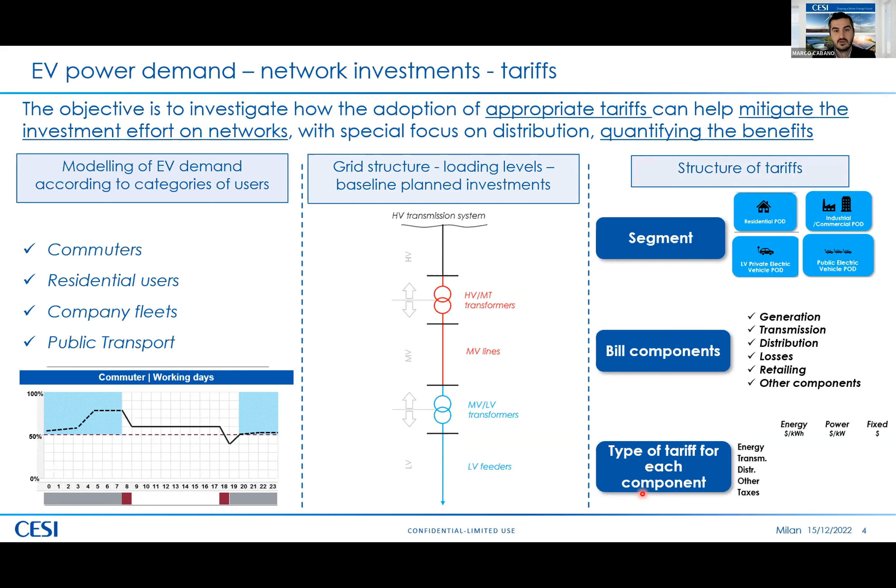We will present the results on a case study in the next slides, but I want to give you a very high-level description of the framework of the methodology we developed to do this assessment. We developed two different models, one for the forecast of electric vehicle demand and one for estimating the investment in the distribution grid.

The inputs of the model for the demand forecast have been the tariffs, flat or time of use, to measure the impact of the difference of the tariffs, the number of electric vehicles, of course, and also many model parameters that I will show in detail in the next slide, like the charging points, the charging behavior of the people, the use of the vehicle, and so on. The output of this first model is the EV electricity demand profile.

This is an input, of course, of the investment needed in the distribution grid, together with other inputs like the peak loads that we now have in the distribution grid we need to analyze, and also the load profile of the network components. We need to know also how the conventional load, so all the load except for electric vehicles, will grow in the next years. And we need to know the cost of replacing the components that need to be replaced because of the increase of load. The output is the additional investment due to the demand for electric vehicles.

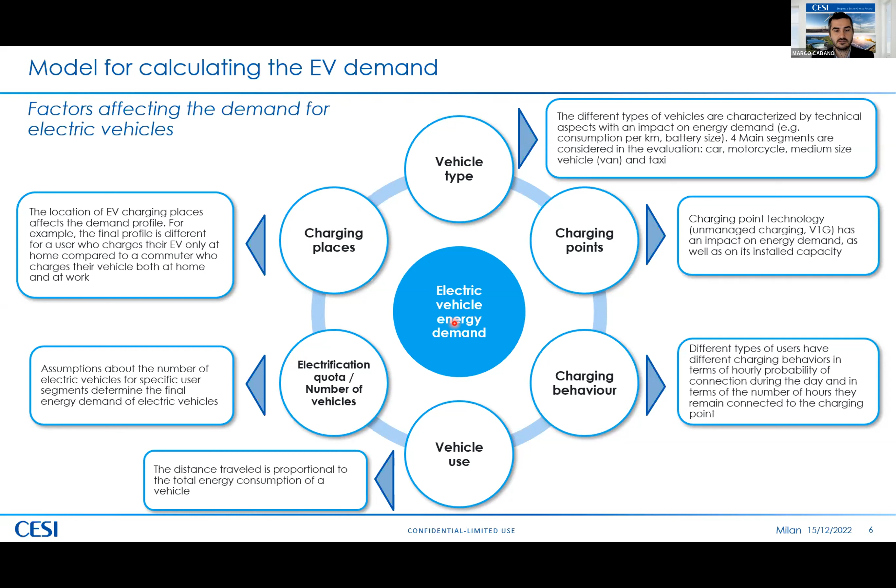So we need to model all this together, and this is very complex, but we developed a very detailed modeling of this.

What we did about time of use tariff to measure the impact of time of use tariff? Time of use tariffs are tariffs which are different during the day. So we did an iterated process in order to define, for the specific context that I'm going to describe in the next slides, which is the best tariff that minimizes the costs for development of the distribution grid.

And in this specific context it was a 2-period tariff with a low tariff period between 2 a.m. and 8 a.m. and a high tariff period in the remaining part of the day.

Which was this context? This disclaimer is very important, because I want to give you in the next slide some figures about the findings of our study, but the important thing is that the results are very, very related to the context. So I want to show you the results related to this context, because they are useful to understand the main behavior, the main figures, but of course, for different contexts, we need to develop specific studies with specific inputs, maybe with the same methodology, but with dedicated inputs.

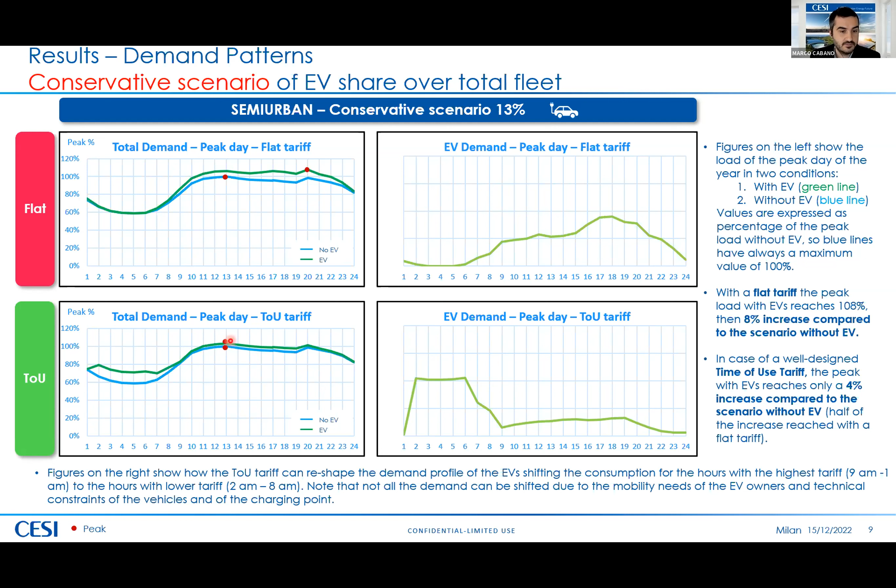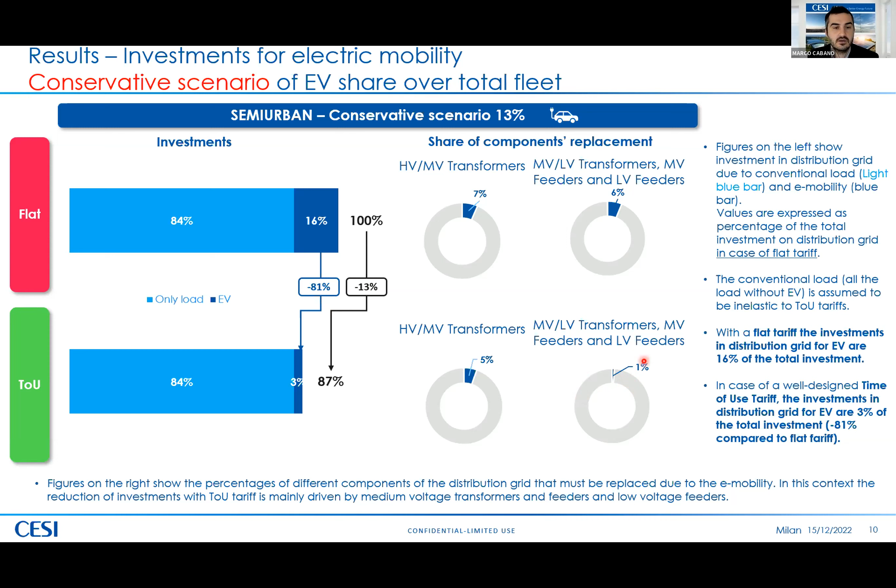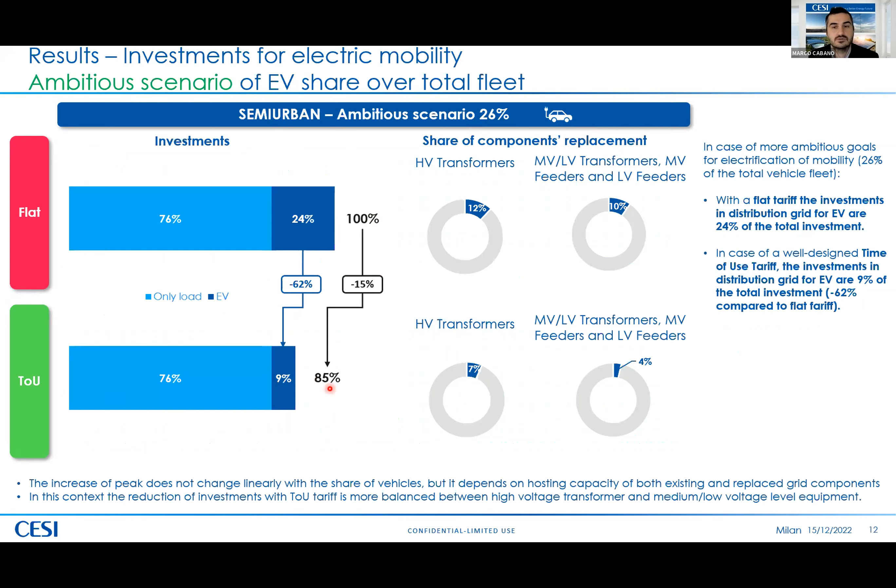And in terms of investments, we have these figures, so an increased reduction thanks to the time of use tariff. What we can see from this slide is that the behavior is not linear with the increase, because we have double the vehicles, but not all the numbers doubled, since the behavior is very non-linear. So we need to repeat another analysis with different assumptions of electric vehicles.

So just to go to the conclusion, we have highlighted the importance of decarbonization in the transport sector. This goal has many implications. Most of them are related to the development of charging points and refueling stations, and also to the development of renewables dedicated to producing the electricity that will feed electric vehicles. We need to improve the transmission and distribution infrastructure, but I hope that with my presentation I also emphasized the importance of appropriate tariff schemes to mitigate investments in the distribution grid.

Of course, we need modeling which is complex, and we also need a lot of data about the distribution grid to do very sound and reliable studies about these topics. So I give the floor back to the other participant in this discussion, and of course if you have questions you can write in the chat, or ask, or contact me later. Thank you very much.

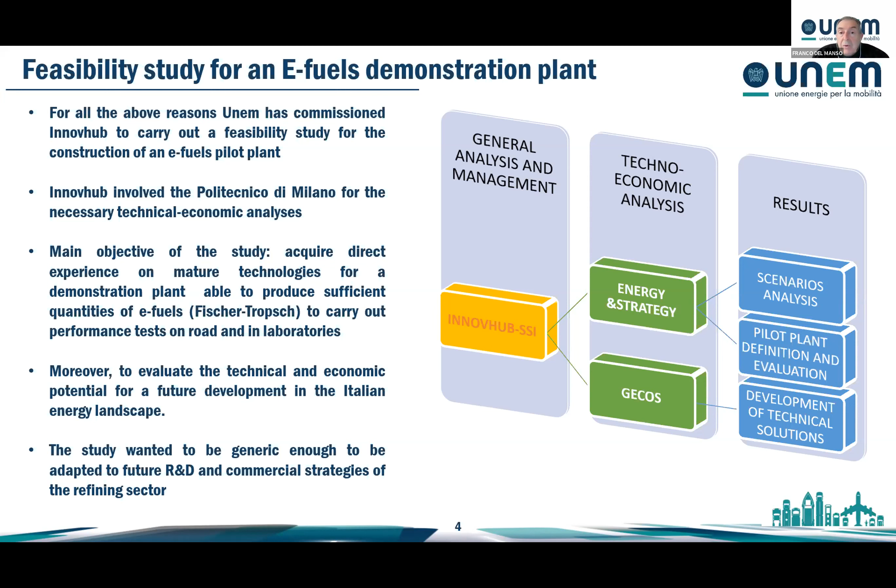So this is the first step, to have a plant, and Politecnico di Milano assessed all the technical and economical potential of this plant. We have, in this slide, a short description of the plant.

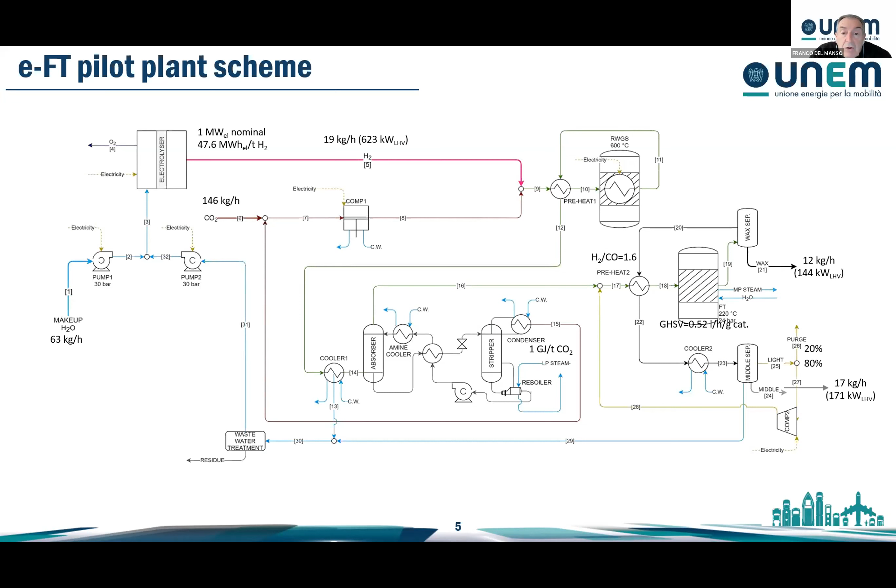In particular, we use electrolysis technology at low temperature, and this is the process that we have used to develop this plant. All the technical aspects are available for people who are interested in this kind of research.

The size of the plant is to produce 8 barrels a day of syn-crude, in order to have an availability of product for our research and for demonstration in real life experiments.

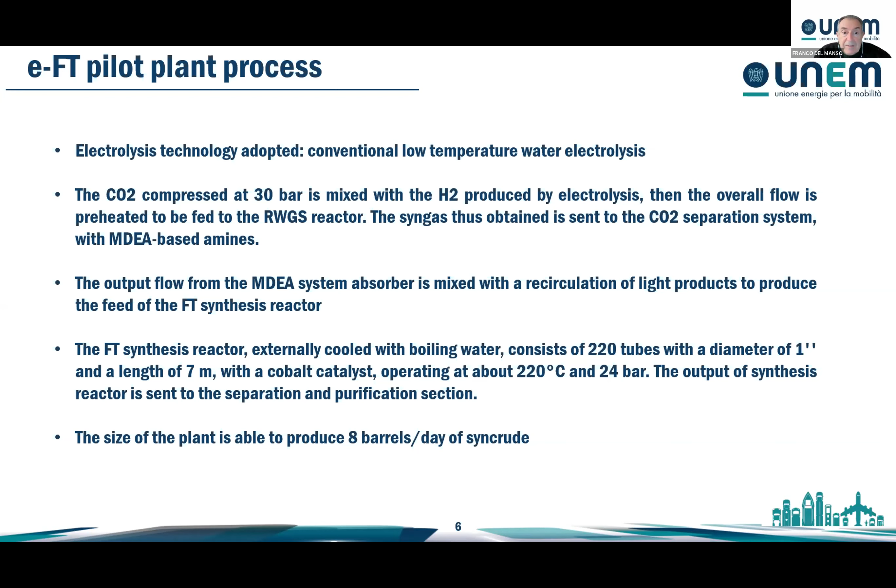This plant has been developed also to implement the evolution of the refining industry. In our opinion, the refining industry that now is totally devoted to the production of fossil fuels from oil can be, and needs to be, evolved in order to decarbonize all the process and to decarbonize all the products.

And the e-fuel plant is a very good example to obtain this evolution, because the refining system has already started to use other raw materials like biomass, like CO2, like hydrogen and green hydrogen, and so on, and waste in particular.

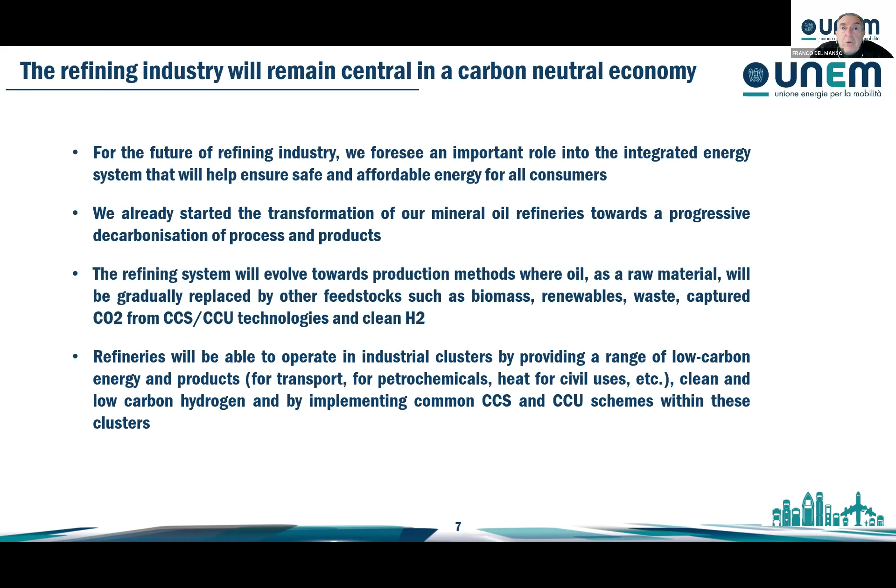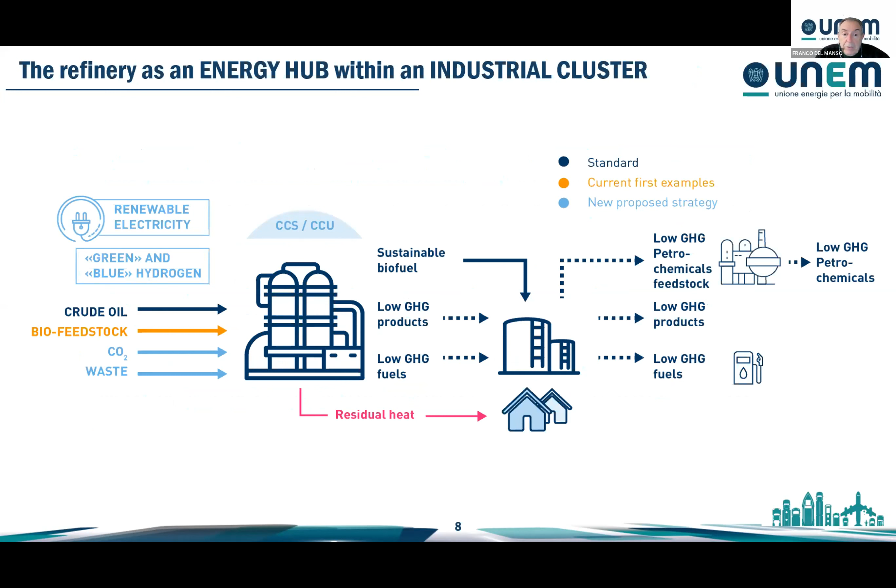But all this is impossible if the current CO2 regulation does not change. We are not against the target that has been fixed by the Commission, and we have seen also in the previous presentation that the transport sector needs to reduce CO2 in cars by 55% in 2030 and 100% in 2035.

But it's impossible to meet this target with this kind of regulation that measures emissions only at the tailpipe, so with the tank-to-wheel approach. This is an approach totally wrong in our opinion, because it does not take into account the CO2 emitted during the production of the fuels or the production of the energy vector that is used.

And so the result is that if you have only zero at the tailpipe, you have not obtained a total reduction of CO2. So this is the main aspect to be changed, because if we really want to eliminate all the CO2 in transport, we have to eliminate also the CO2 that is produced before the use of the car.

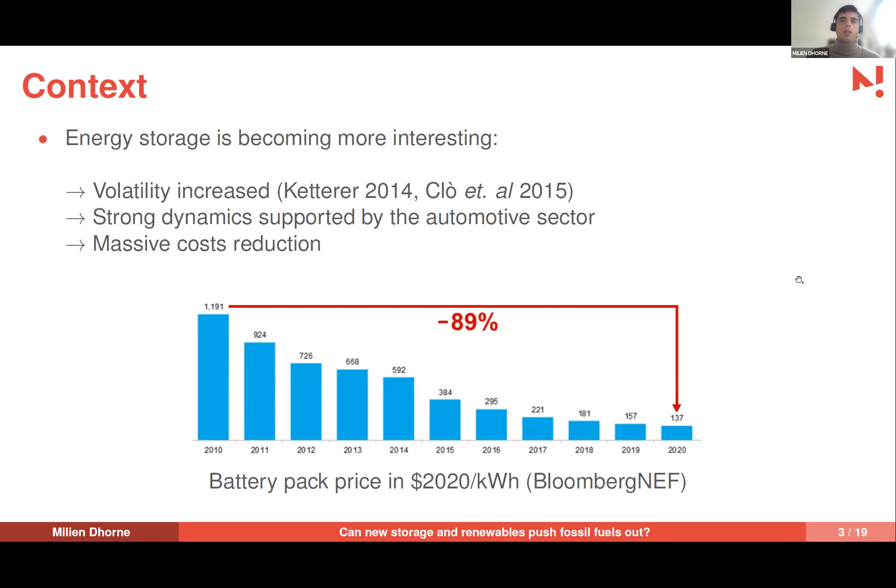Storage is becoming more interesting recently, because we've witnessed on the European markets that volatility increased, which is good for storage, because it means they're becoming more profitable just by arbitraging prices. We've also witnessed strong dynamics supported by the automotive sector that resulted in a 90% drop over the last 10 years, for example, for the battery pack. So it's a massive cost reduction that makes it more interesting, and we have to look into that from an energy economics point of view.

So what do we know? Because storage economics is not really new, it has been here for a long time. Basically, we know that storage increases the value of variable renewable energy. We have a lot of results on that, but it's mainly at the firm level and not a market equilibrium approach. We also know that storage can capture different revenues from different markets, so it's very versatile, and it needs to be active on different types of revenue streams. And finally, that market design and imperfect competition is a huge driver for the appearance or profitability of storage. So these are the results we know.

What we do not really know, though, is what the storage development potential is. We have a few studies that are not completely satisfying, and in particular we have a lot of studies dealing with the European power sector at 100% renewables. So we just have a snapshot in 2050, and we don't have the transition towards that, taking into account the fact that we currently rely on a lot of fossil fuels, which could prevent or delay the appearance of renewables and storage.

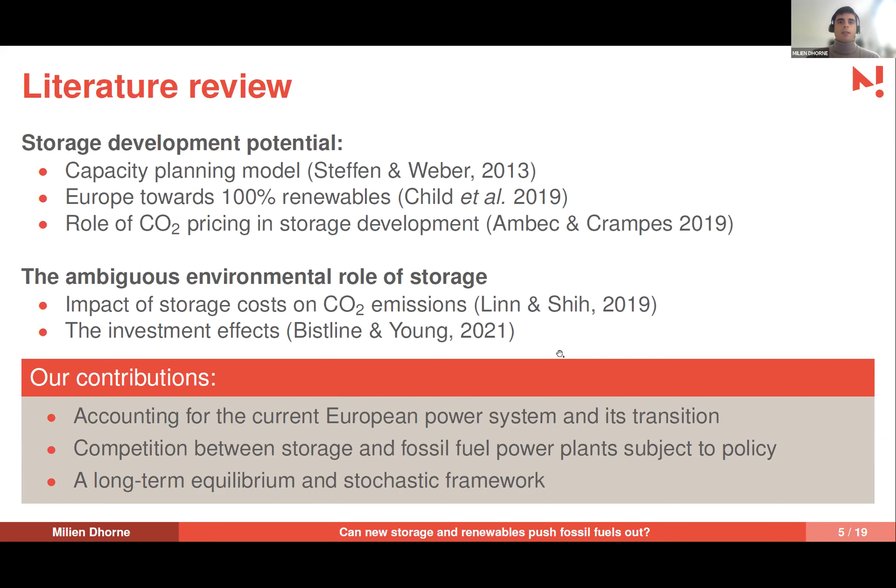We will build a framework that models competition between storage and new fossil power plants, and we will evaluate different policies long-term, developing a long-term equilibrium and stochastic framework to do that. But let's start first with an introductory stylized model, so you get some insights about what's happening and why storage could help or not help reduce emissions in the market.

It's a very simple model building on Linn and Shih, which we improved a little, with two periods: an off-peak period and a peak period. The off-peak period is a low price period, and the peak period is a high price period. Solar is going to produce only in the off-peak period, which is usually the case in Europe—we have morning and evening peaks where solar isn't producing much. But for wind, given a probability P_wind, it could be producing in both periods with the same probability.

Again, it's interesting to see what happens when storage enters the market. Storage is going to apply a very simple rule: buy low and sell high. So it buys in the first period where prices are low, increasing demand by quantity QS, which I'll define later—for now we just introduce this quantity.

The idea is that storage pushes up demand in the first period, increasing the load factor of the base load technology, called A, and increasing the price. By selling in the second period, it decreases the price, reducing production of technology B, the peaking technology. But the magnitude of the decrease is lower because of round trip efficiency—storage is imperfect, and the round trip efficiency is not 100%. So by charging and discharging, it loses part of the electricity.

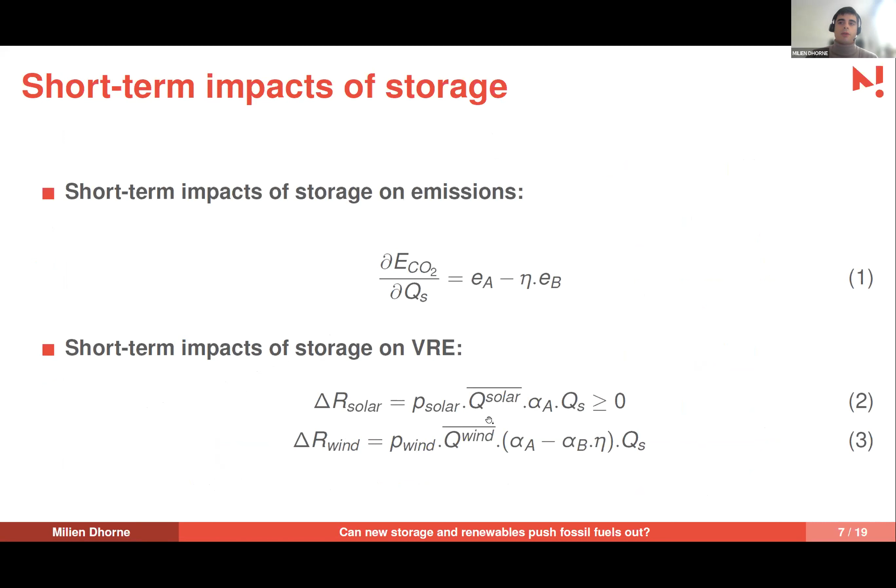So it depends on the shape of the supply curve. Is the supply curve concave? Then it's probably beneficial for wind. But if it's convex, then the price decrease in the second period is greater than the price increase, and wind is not better off, is losing money from the presence of storage.

This was for the short-term impacts. We look now at the long-term impacts, taking into account new investments. And if we allow new investment in variable renewable energy, what happens is that we can see it helps solar to develop. And again, for wind it's not really clear.

And if we look now in a framework where we allow new baseload, basically technology A capacities to enter the market, well, we still have an effect where solar is going to help. Storage is going to help solar, but we'll lose the effect for wind. So basically, whenever there is a dispatchable fossil fuel powered technology, the effects of storage on wind are limited.

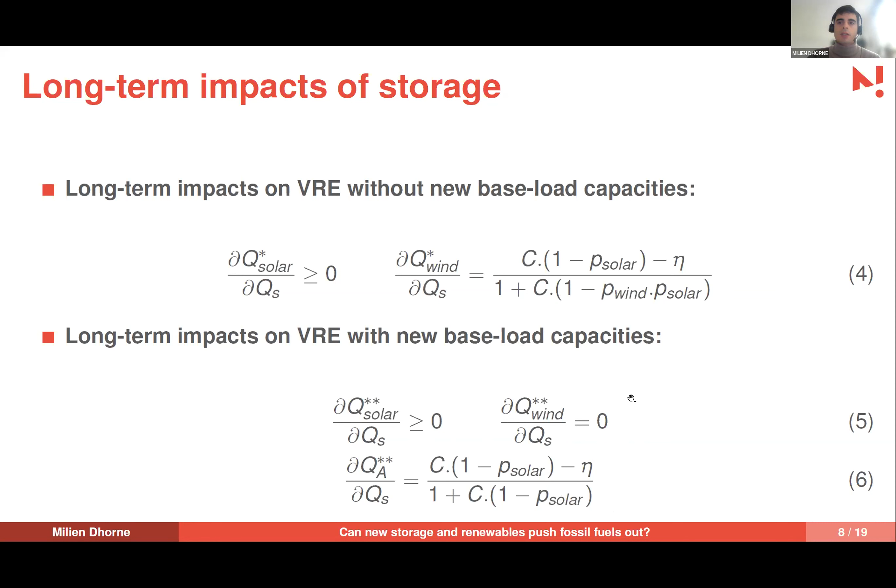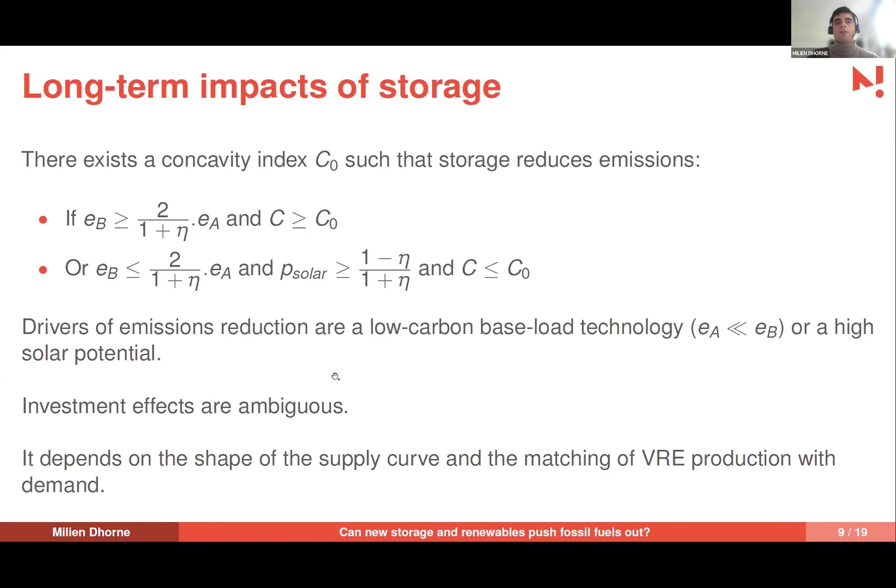What is exogenous and fixed in this model is the demand, which is based on historic data and also the current power mix. We will introduce a growing number of electric vehicles and see how it changes the dispatch and the emissions. We have also taken into account the increase of interconnections, which are based on some predictions by the TYNDP document, for example.

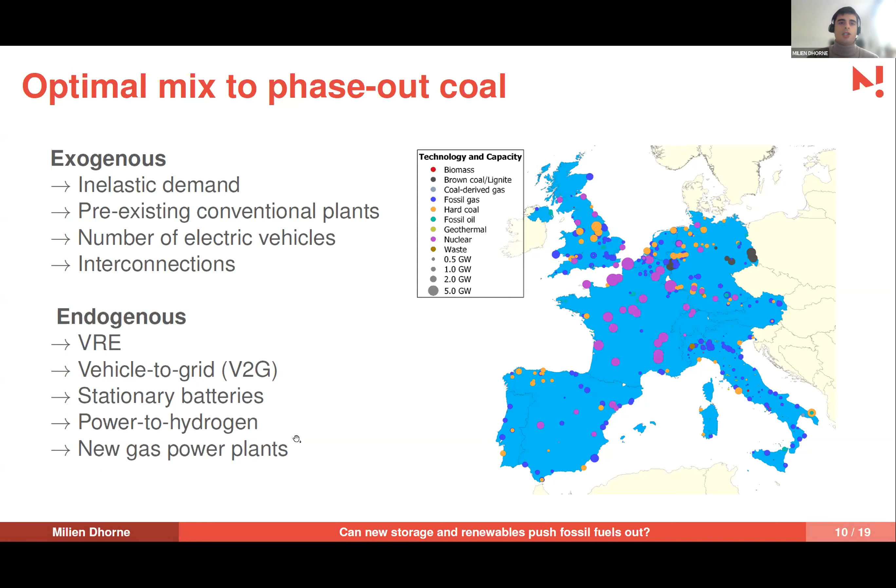What is endogenous in this model is the variable renewable energy capacities, the vehicle to grid, which is basically the conversion of some electric vehicles into fully reversible storage units, and other types of technologies. In some cases, we also allow for new gas power plants, which is CCGT in this case, to enter the market.

Very quickly about the data, I've been using very famous databases, Renewables.ninja, the transparency platform, and things like that. So we've been developing a stochastic approach using scenarios, and we are looking at the long-term equilibrium, which is basically linear optimization.

So this is just the way we've been building scenarios. It's a Monte Carlo approach. We've been sampling from historic data on these variables, so solar, wind, offshore and onshore wind production, the load, the nuclear availability in some countries, and the water inflows. And we get some weekly scenarios. We've got 600 weekly scenarios, and we minimize the cost over all these scenarios. So it's a bit more robust than if we used just a simple year, for example.

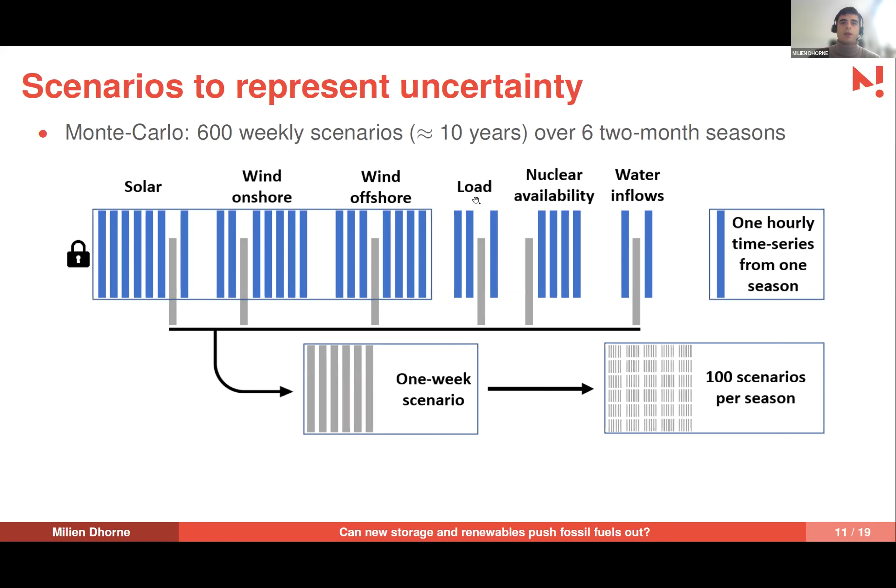And this is basically the program. This problem is solved in 2 policy cases, and this is important now. First, we allow for new gas CCGT to replace what we're going to phase out as coal capacities. So basically, we make a shock, which is phasing out coal capacities by 2040, and we allow it to be replaced either by new gas and storage or just storage. In the second case, we do not allow for new gas to enter the market.

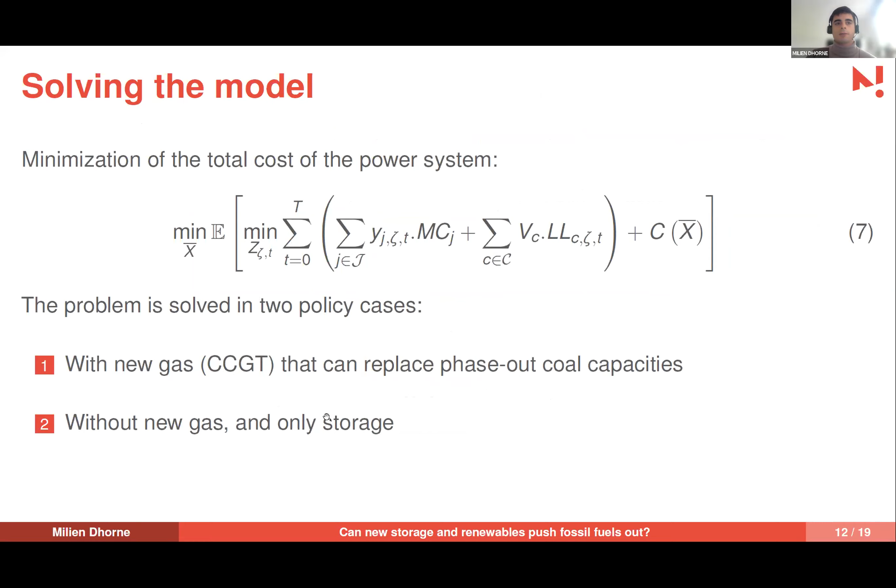And if we look at the results, we can see the 2 cases, the first case is green. So it's with new gas being allowed, and what we phase out in red as coal capacities is entirely replaced first by gas.

So there's nothing that goes for storage. Everything is just, the flexibility comes from new gas assets. And at some point in 2030, there is a decoupling of the coal phasing out curve and the gas installations, because we increase the capacity of storage, and basically it's vehicle to grid mainly.

Now, if we do not allow for new gas to enter the market, what happens is that it is the blue curves this time. We have more storage earlier and in a steadier increase, first with vehicle to grid, and then with batteries and a little bit of power to hydrogen.

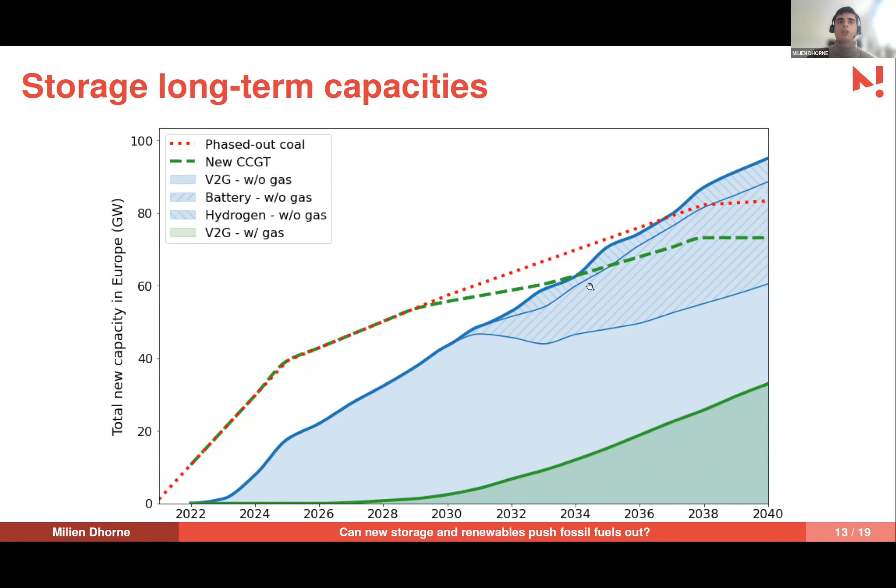If we look at the CO2 emissions now in both cases, what is interesting is to see that if we allow for new gas, it's better, environmentally better. We save almost 1 year of emission towards 2040, but at the end of the period, it is emitting less emissions to rely only on storage and not use new gas power plants.

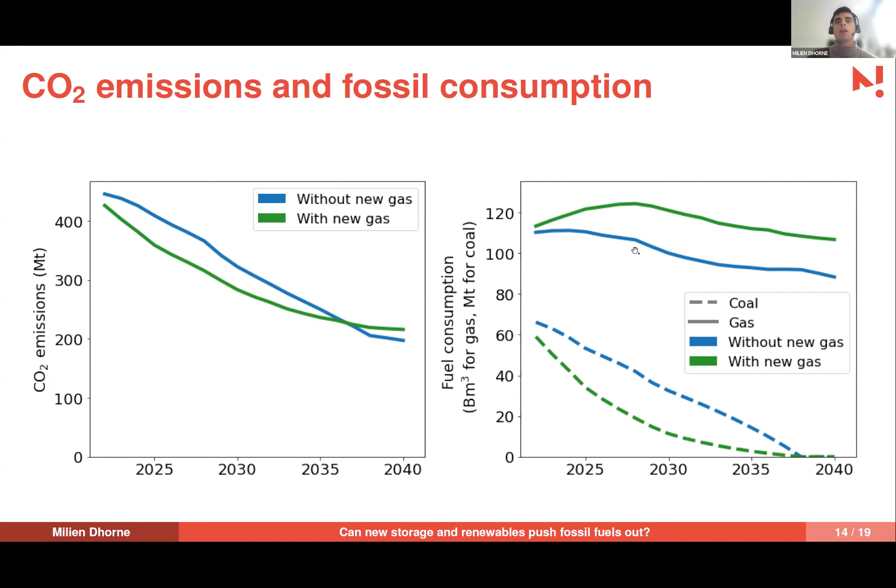And this is easily understood if you look at the fossil fuel consumption. The fact of using new gas or allowing new gas to enter the market helps us to reduce the coal consumption much quicker, which leads to lower emissions, but it maintains the consumption of gas very high, whereas we have a reduction of our energy dependence towards gas if we go for storage.

So overall, if we conclude about this study, we use the stochastic long-term equilibrium model to evaluate the impacts on the European markets of storage. And we find evidence that without a strong public support scheme, which is either higher renewable energy shares or coal phasing out or freeze gas investments, there's no room for storage. Storage will not massively enter the energy-only market, which is expected in the literature.

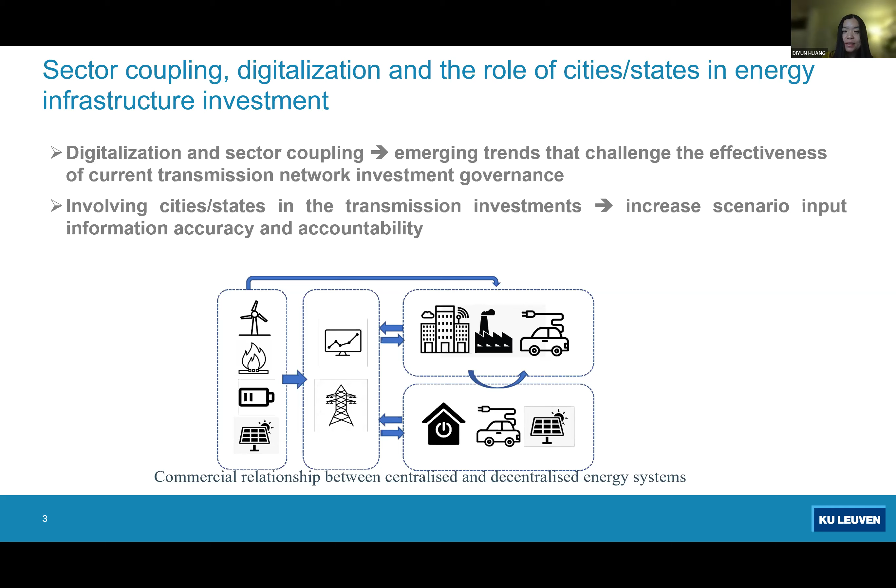As we just talked about the increasing role of decentralized energy systems, there is still a very important role for the cross-border network in the future, as it connects resources over long distances, so it can tap the potential of complementarity of resources from far away, like solar in Southern Europe and wind in Northern Europe. The weather pattern correlation is low, and so together it gives a more reliable electricity supply. So we envision the future energy system to be a combination of centralized and decentralized elements.

Then we propose to have collaborative governance to reconcile the centralized and decentralized energy system elements, and to involve the affected stakeholders to come together and make decisions together to work towards the common decarbonization and economic objective. We find some discussion in literature about collaborative governance, and it features public and private stakeholder involvement, and very importantly, direct participation in decision-making from private actors.

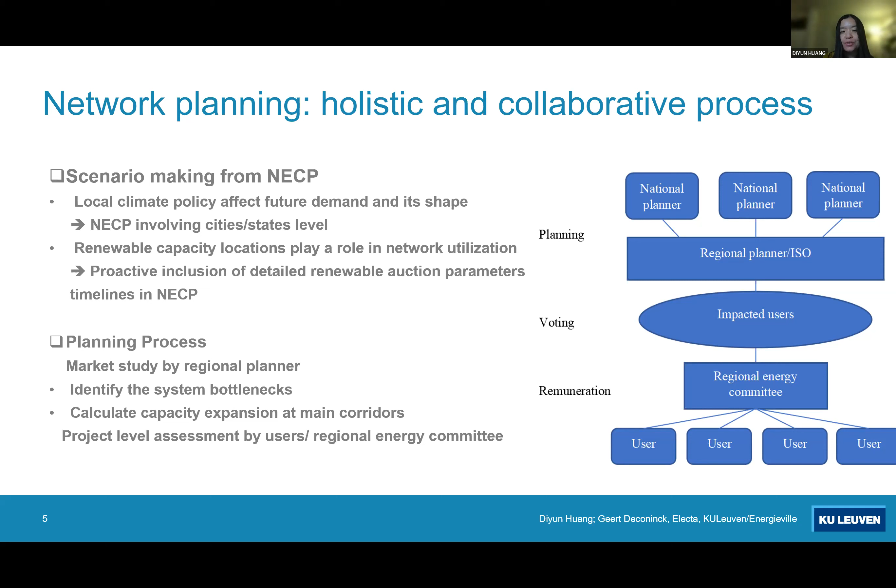Here, we suggest this user voting approach, which was inspired by an Argentinian public contest method, right after the industry was privatized. The rationale behind user voting is that it can help to depoliticize transmission investment, or make it more independent from government involvement. At the same time, grid users know better than a centralized planner about their vision of future energy involvement and their own preferences, their own cost-benefit perception. This will mitigate some of the uncertainties we just talked about.

For the process to function, first, the potential network investor should submit a project proposal to the regional planner. Then the regional planner will put the project into the market simulation tool to calculate electricity usage of the line by each user, and then he can use that to identify the most impacted users. Then this group of users, preferably with a limited number, are invited to come for a user voting. Then the project that passes a certain user voting threshold gets approved. Afterwards, the planning assumption, the cost allocation agreement, and the project costs are saved in a distributed ledger for output-based